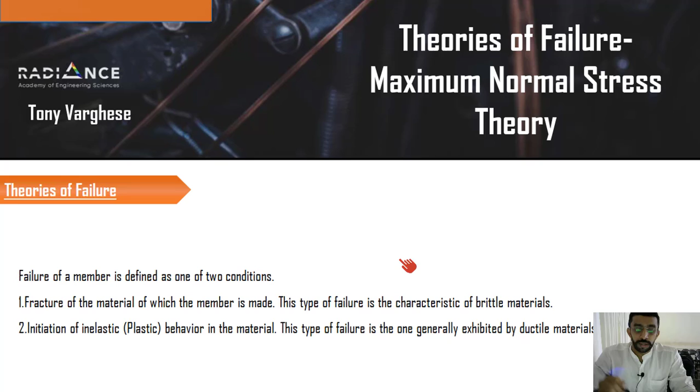So let's define one by one. In this class, we are going to define the maximum normal stress theory, and how these theories are defined. Before moving into that, let's have a brief discussion about theories of failure. How can we define a failure? That's the first question we need to answer before moving into the theories of failure.

See, failure is not the breaking of a material into two. That is not always called a failure. Obviously that is a type of failure, but when we talk about failure in terms of mechanical engineering or mechanical parts, we have to redefine it. If a component has deformed or undergone any kind of change which makes it inappropriate in that particular application, then that is considered a failure.

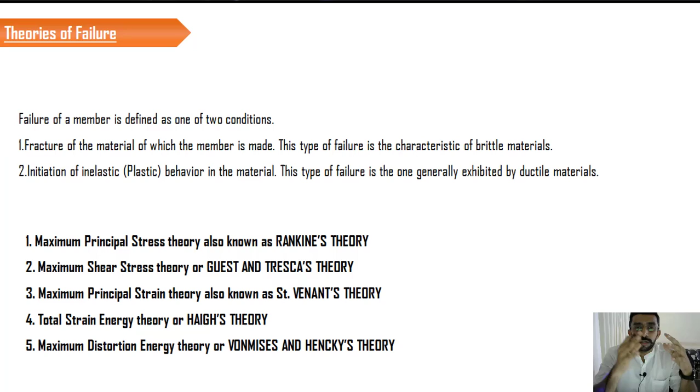Suppose you consider a shaft which transmits some amount of power, and after some time, after application of load or after some course of time, some kind of bending or permanent deformation happens to the system. After that, when we switch on the system, severe vibration develops. That means the shaft didn't break apart, but instead it permanently deformed, and the sole purpose of the shaft is not satisfied - it's not transmitting power, instead it creates large noise and vibration.

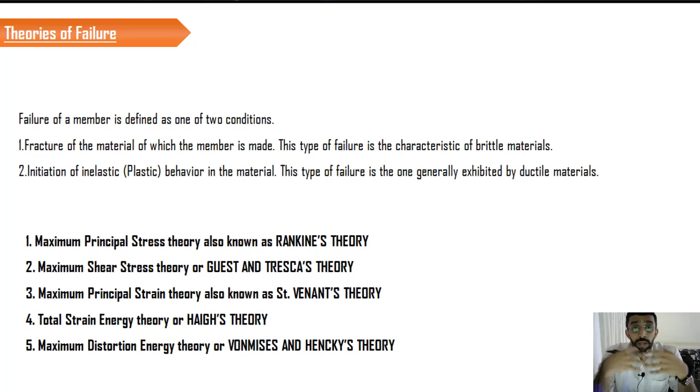In such cases, this is also considered as what? Failure. So anything which is beyond application, anything which results in a component not suited for any application, is considered failed. That is the scenario we have to talk about.

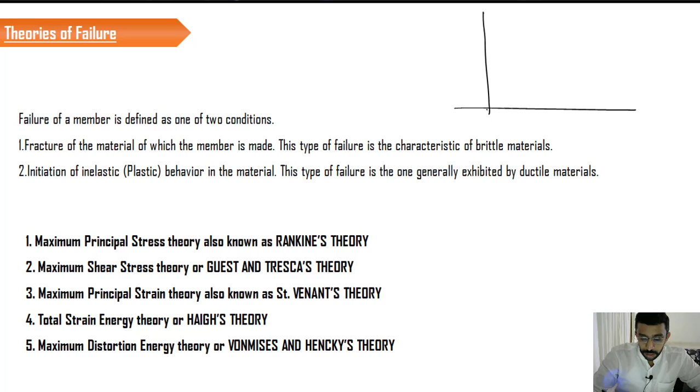Now if we consider failure as permanent deformation, how can we theoretically write deformation? Theoretically, a material is failed or deformed permanently when it makes it inappropriate for an application. It's very simple - we know by the stress-strain curve, let's say this is how the stress-strain curve looks. We know that beyond the yield point, the material is in the plastic zone.

Plastic zone means some kind of permanent deformation has happened in the material, which is considered a failed component. Generally, something in the plastic zone is considered failed, but for some cases we say beyond ultimate is considered failed. The only way we can say whether a component is failed or not is simply by comparing it with the yield value or the ultimate value. In simple words, when I apply a certain load on a material and the developed stress within the body crosses the yield stress or the ultimate stress, it is considered a failed component.

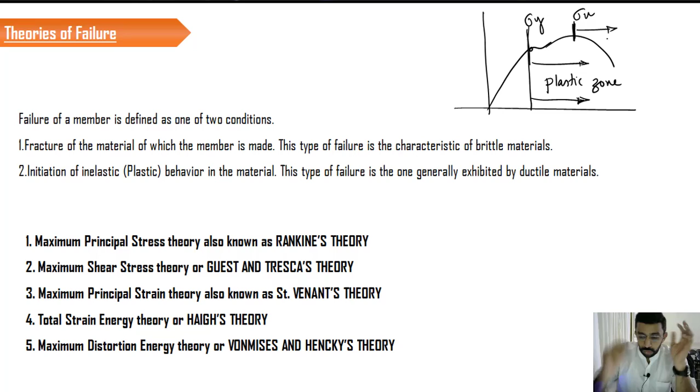In short, the allowable value should be very much lesser than the ultimate value or the yield value. We know that the material is working in a critical condition if the stresses are close to the yield value or the ultimate value. So we have to design a component where the internal stresses developed are far below the ultimate or yield value. That is the ultimate aim.

So everything is limited or discussed in terms of the maximum allowable value. We know that a material will fail when it crosses the ultimate value or the yield value, or crosses the maximum shear stress, maximum yield shear, or ultimate shear. Or we can say a material will fail if the total energy, strain, or maximum strain has crossed beyond a particular value. When the principal strain or maximum strain developed in a material goes beyond a particular yield value or yield strain, it is considered failed.

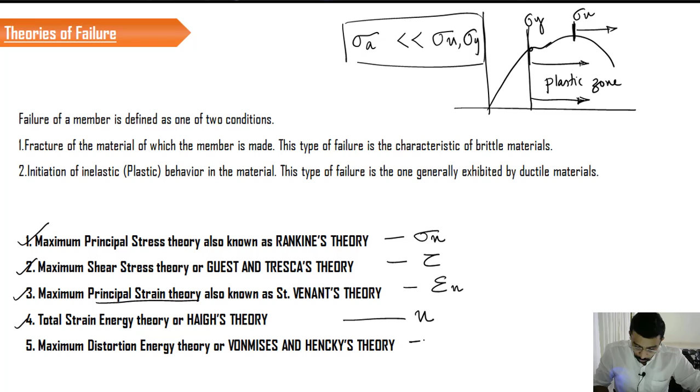If the energy has crossed a certain threshold, it is considered as failed. So these are the different theories of failure, where generally we say we have 5 theories: the first is the maximum principal stress theory, based on normal stress; the second is the maximum shear stress theory, based on maximum shear; the third is based upon the maximum principal strain theory, based on strain and displacement. The fourth is based upon the strain energy U, and the fifth is also based upon strain energy. So one by one we are going to discuss all these 5 theories of failure.

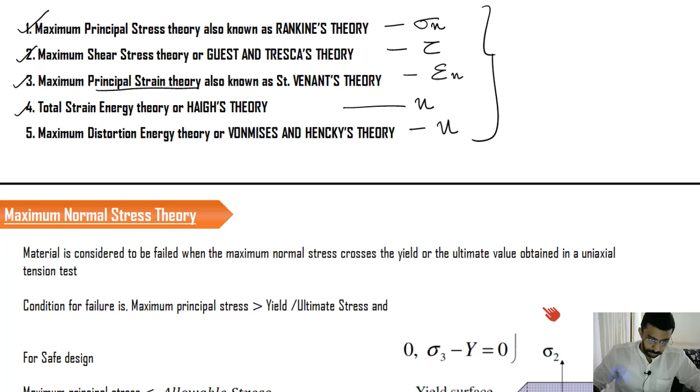Now let's move on and discuss the maximum principal stress theory. As the name suggests, maximum normal stress theory is related to the maximum normal stress, sigma n.

We learned about this maximum normal stress in our initial classes, where when we apply a set of loads on a system, there will be 2 types of stresses generated within the material: normal stress and shear stress. We learned the equations to calculate normal stress in any plane, and we learned that the maximum normal stress is the principal stress. I hope you all remember this concept — the maximum possible value of normal stress that develops within a material is the principal stress.

That means if you have a set of loading, say sigma 1, sigma 2, sigma 3, led by sigma x, sigma y and sigma z, and if you calculate the maximum normal stress, say sigma 1, the maximum normal stress theory states that if this value of sigma 1 is greater than the yield value sigma y, it fails. That's the simple way of explaining the maximum normal stress theory.

But as I told you, we are discussing all these theories of failure in the light of safety. So if we have to define the maximum normal stress theory properly, we should say the developed maximum normal stress should be less than the yield value, because if the stress goes beyond the yield value, it leads to failure. That's how I defined it — the value of stress should be way less than the yield value.

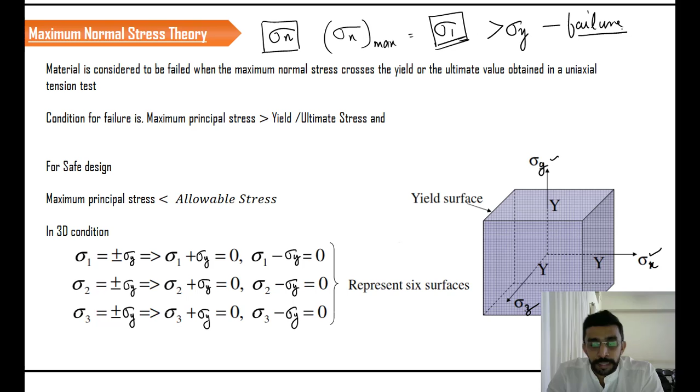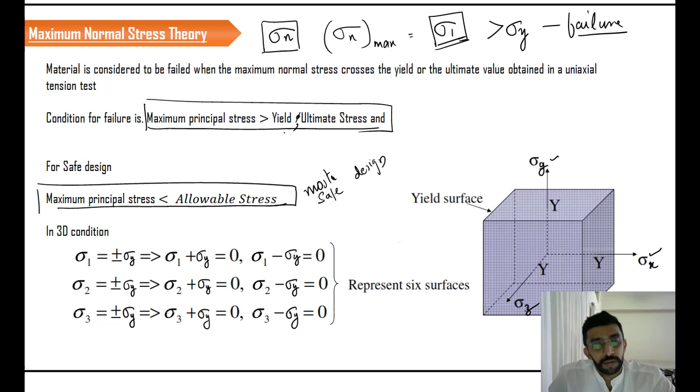More precisely, we can say that the maximum principal stress should be less than the allowable stress. This is the most safe design. This is a critical design where the maximum principal stress crosses the yield value or the ultimate value, and the system fails. That's the ultimate meaning of it. But for a safe design, the maximum principal value should be less than the allowable value.

When we talk about allowable stress, we have to bring factor of safety into account. That means sigma allowable is nothing but sigma yield divided by factor of safety. This is how it is defined. So the generated maximum normal stress, none other than the principal stress, should be less than the allowable value. Now let's see how this safe zone will look.

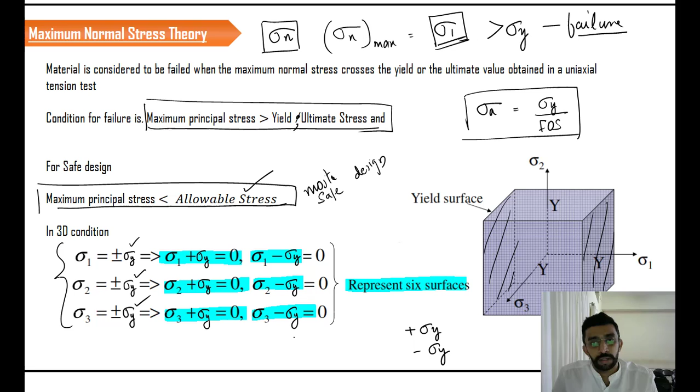If we plot all these equations in 3 dimensions, it's going to look something like this, with 3 principal axes: sigma 1, sigma 2, sigma 3. If we write sigma 1 equal to sigma y, one face will come; sigma 1 equal to minus sigma y, the next face comes. Similarly, if we plot all these equations in the 3-dimensional plot, it forms something like a cuboid.

I think it's better if we limit our discussion to 2 dimensions, where sigma 3 equals 0. In that case, we have equations like sigma 1 equal to plus or minus sigma y, sigma 2 equal to plus or minus sigma y. Now let's plot this set into our 2-dimensional axis, where this is sigma 1, this is sigma 2. We can say that if sigma 1 is equal to sigma y, this is how the line is going to be — sigma 1 equal to sigma y.

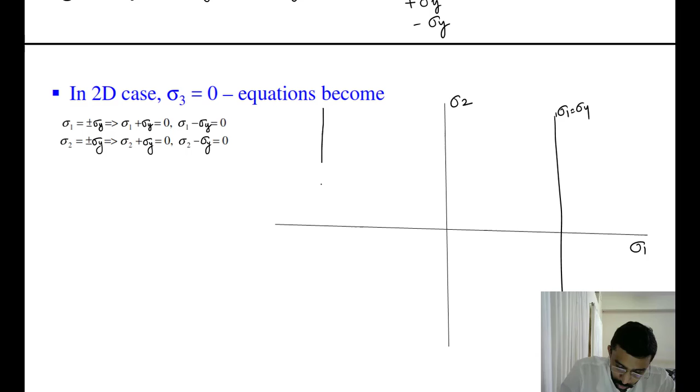Now if sigma 1 is minus sigma y, this is going to be the line: sigma 1 equal to minus sigma y. Let me bring these things closer for a better idea. So this is sigma 1 equal to positive sigma y, and this is sigma 1 equal to negative sigma y. Similarly, for the other two, sigma 2 equal to positive sigma y is this line, and sigma 2 equal to negative sigma y is this line.

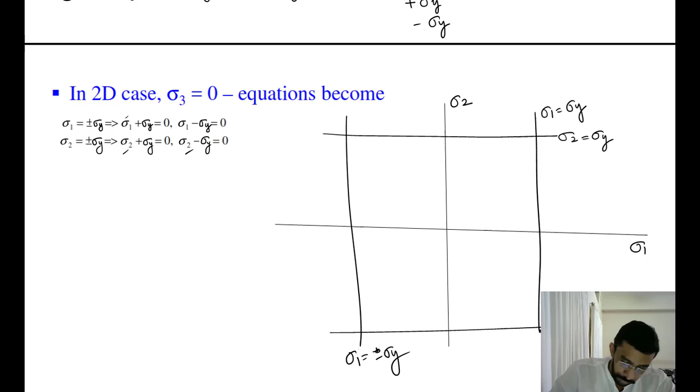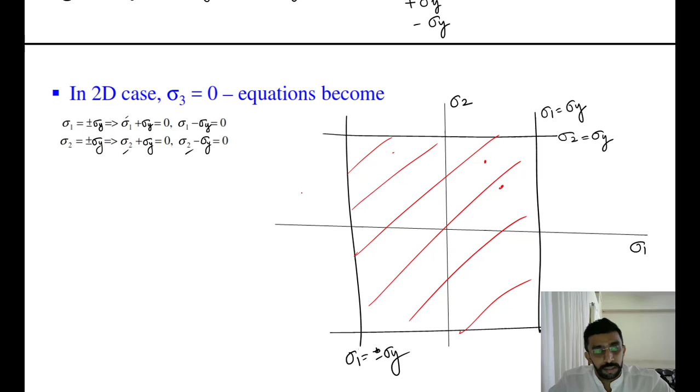That means we can say this is the safe zone when we design. If you take a stress here or there, or any stress that comes within these four boundaries, it is in a safe zone. In other words, if we design a component based on stresses within this limit, it can be considered a safe design. So this is how the plot of maximum normal stress theory looks, and this is the area in which this theory is valid.

Now where can we apply this theory? Basically this theory is suitable for safe designs of machine components made of brittle materials under all types of loading. That's another important thing. This is not suitable for the safe design of ductile materials.

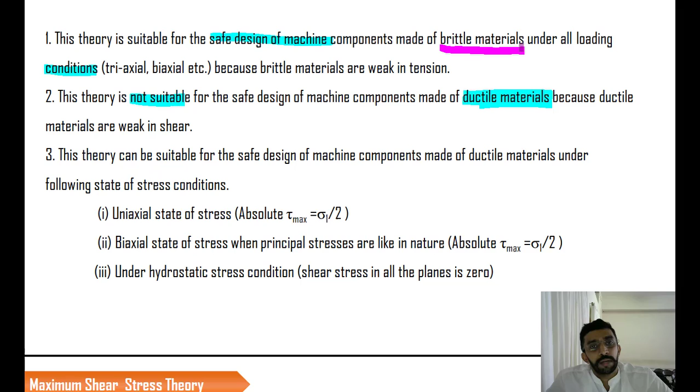You might be wondering why we use brittle materials and not ductile materials for this failure criteria. The reason is simple. If you refer back to the stress-strain curve lecture, I clearly stated that ductile materials fail by shear, not by normal stress, whereas brittle materials fail by normal stress. Because of that, we use normal stress theory for brittle material design and shear stress theory for ductile material design, which I will discuss in coming lectures.

Ductile materials are weaker in shear, as we've already discussed. This theory can be suitable for the safe design of machine components made of ductile materials under the following conditions. There are special cases: the uniaxial stress case, where maximum stress tau max is sigma 1 by 2.

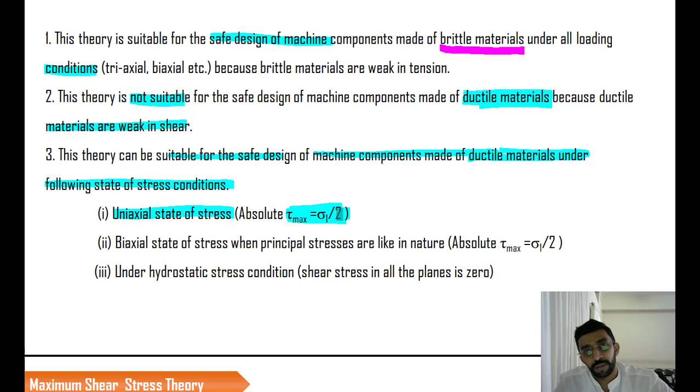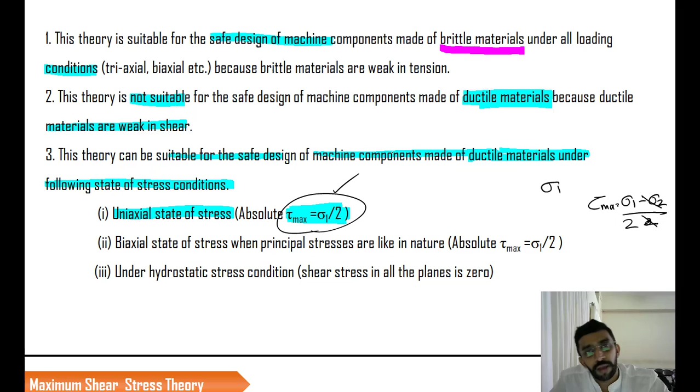In the uniaxial case we have only one stress value, sigma 1, and we know that tau max equals sigma 1 minus sigma 2 by 2. So for the uniaxial case, tau max is sigma 1 by 2, as denoted here. If we use sigma 1 by 2 as the limiting value, we can design ductile materials under the uniaxial condition.

Now another condition: biaxial state of stress when principal stresses are alike in nature. Same reasoning applies, because even though we design these ductile materials using sigma values, ultimately it correlates to maximum shear values - that's the only meaning. Even though you're using the maximum normal stress theory, when you go behind the derivation, it ultimately relates to the shear stress only. On the front page you see normal stress, but behind the scenes it's actually equating with shear stress.

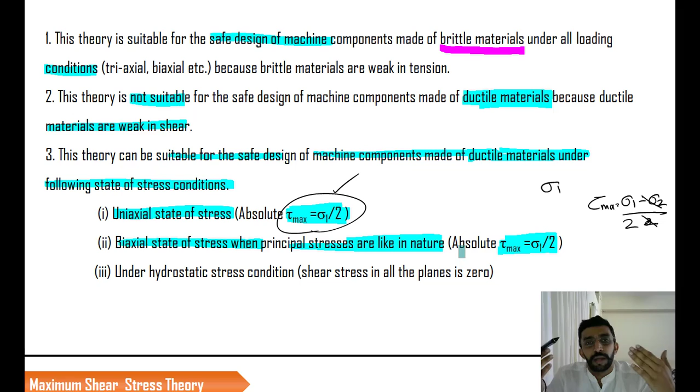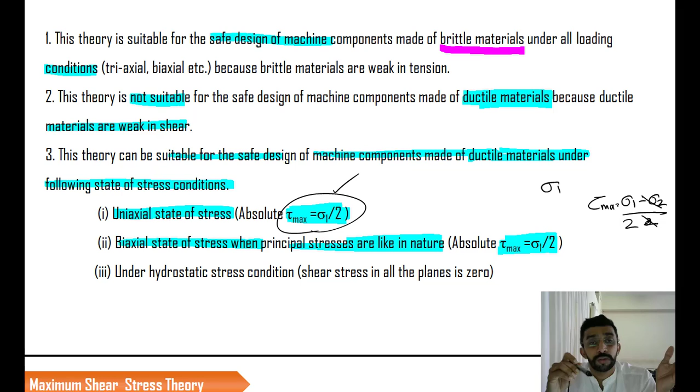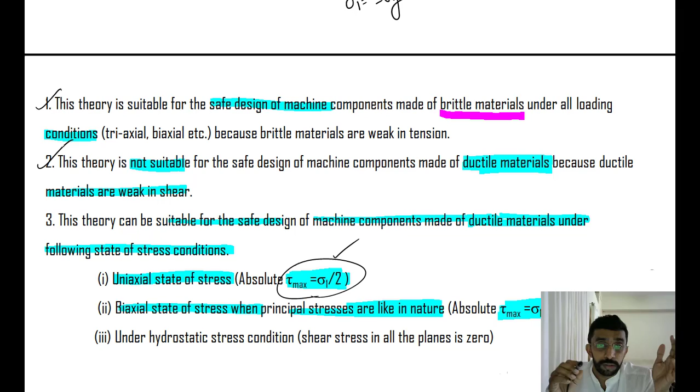So these are the three different cases where we can use the maximum normal stress theory for designing ductile materials. But to conclude, the first two statements are very important, and that's how we use it, because when you learn the maximum shear stress theory, you will understand. It's always recommended that for brittle materials you use normal stress theory, and for ductile materials shear stress theory is better - not necessarily the best theory, since we have other theories too. Once we complete all five theories of failure, you'll understand which is considered better. This betterment is purely based on the area under which the design is considered safe.

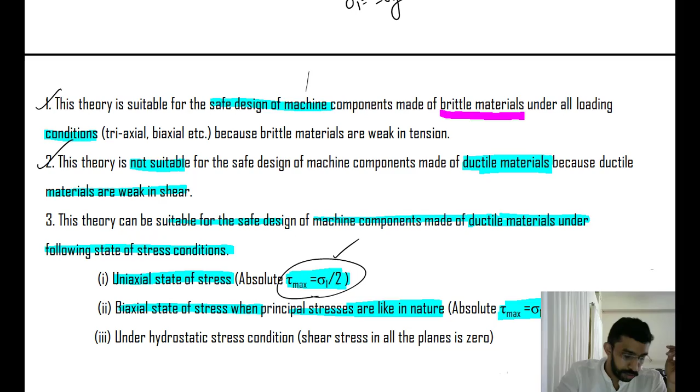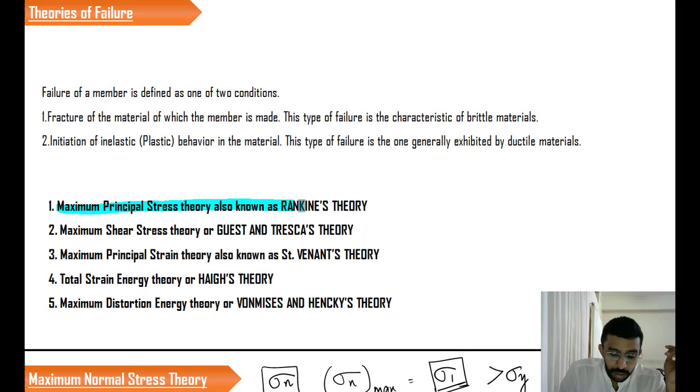That's all for the normal stress theory, and in the next class I'll discuss the maximum shear stress theory. This maximum principal stress theory is also called Rankine theory - that's another way of calling it. Sometimes in exams they may ask you to explain Rankine's theory of failure. Next we will discuss the Guest or Tresca theory of failure, since these theories were postulated by different scientists and given different names. So right now we've completed the Rankine theory, and next class we'll discuss the maximum shear stress theory.